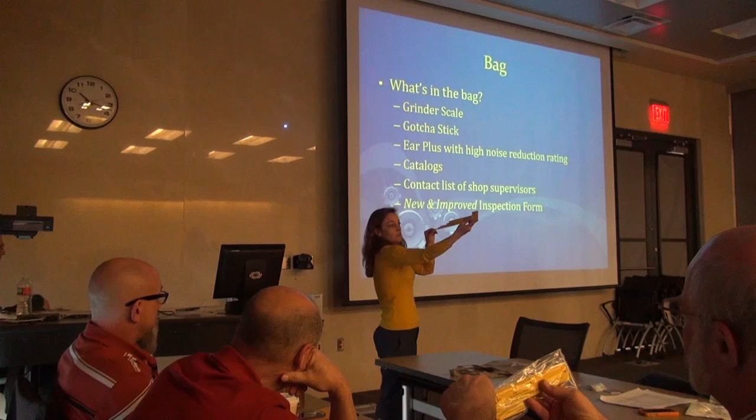Okay, you guys each have a bag. What's in the bag? What we put in the bag were grinder scales, for which you'll notice this is one of the requirements on the machine inspection form, and a gotcha stick, which I don't have - thank you. What a gotcha stick is, it shows you how far your fingers can be based on the size of the opening. So if the opening is that wide, you can safely have your fingers over here. If the opening is that wide, your fingers can be here safely.

We put high noise reduction rating earplugs in there for you to keep - not going to want those back. Also catalogs of some of the most common machine guarding companies that sell guards.

We don't support any of them in particular, but we want to give you guys some place to start: a list of the current shop supervisors that we have, and a new and improved inspection form.

Okay, we're just going to have a brief review. As you guys are all aware of the accident at Yale in 2011, from that came the student training. We convened a working group of several members here, including Joe Kakuda, mechanical engineering, and facility services.

Basically, it's an online training which introduces students to the university rules, which are also on this poster. If you need any of these posters, we'll be happy to give them to you. But a lot of it's common sense about not wearing certain things, not listening to a music player, things like that. They do the online training first, then the hands-on, and then they'll pass the test.

We've embedded some safety videos on the most common pieces of equipment, like a bandsaw, drill press, lathe, mill. And then they have the hands-on training, where a faculty or shop supervisor will show them how to work on the piece of equipment, and you guys will sign off that they know what they're doing.

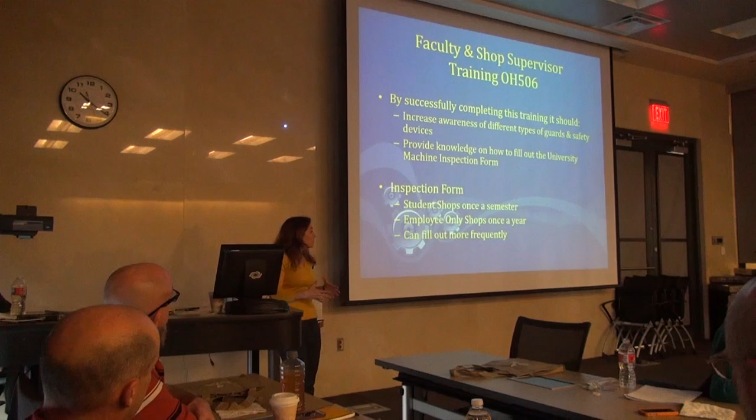You guys are always welcome to fill it out more frequently and to add additional requirements, and any equipment that's not on the list, add it. So if you have a planer, we want you to add that too. If you need some tips on how to inspect that, and it's not available on the website, just give us a call—Daniel and my contact information is on the contact list.

It can be a little challenging to find where our information is. So this is the main EHS webpage, and my group is the Campus and Occupational Safety. You click on there, and then you would go to Shop Safety, and this is where all the shop safety information is that's related to equipment.

So we've got the student training. We have this in PDF form for shops that employ people outside of the university—they can do that. There's the machine guarding training, the shop safety checklist, and that's so you guys can document when you've done the hands-on training for the students.

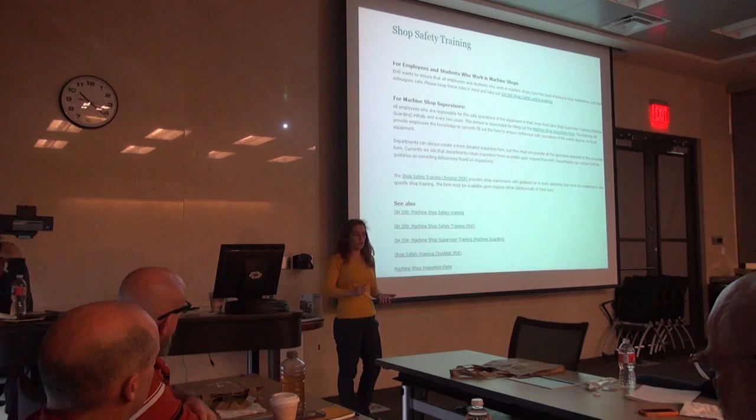And then the machine inspection form, which there is a copy in your bag. At this point, we're just asking you to keep the inspection forms, and when we come around to look at your shops and machine guards, we may ask to see that.

For any electrical work that is done on campus that you employ your electrician or you do it yourself, you've got to make sure that it's up to National Electric Code. What you would do if you don't have an electrician on staff is you would submit an SR10 to PMCS.

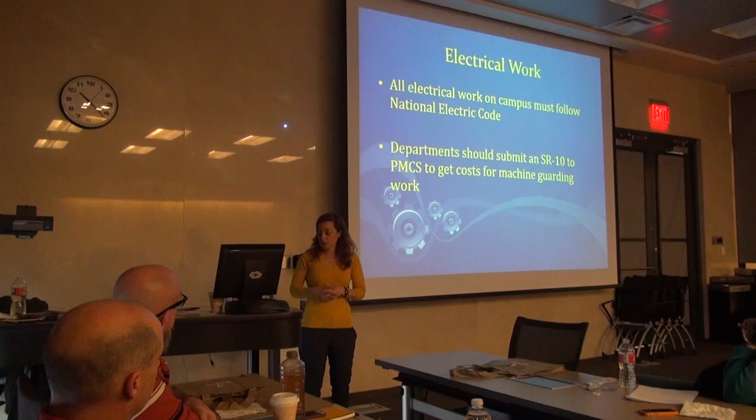And they can come over and give you an estimate for the work that needs to be done, and we can help you prioritize in terms of what should be done first. I know that several departments have successfully put in requests for WCI money to get their guards fixed and some of the electrical updates, so that is an option for some of you that want to submit for that.

As we were going through this, we've been noticing some holes that we needed to close.

We're also running the hearing conservation program right now. We've put noise dosimeters on people that run machine shops. And for many of them, their hearing levels were below 85 for a time-weighted average, which is about the sound of a residential smoke detector.

But we know that when you run certain equipment, it's still very loud. So in order to be protected, what we've decided to do is either the safety coordinators or managers such as Bo, Jennifer, or Lee will go around with an area monitor, and if the equipment is 85 or above, they'll put a sticker on it. And then the employees would wear hearing protection that the university would provide, typically earmuffs or earplugs.

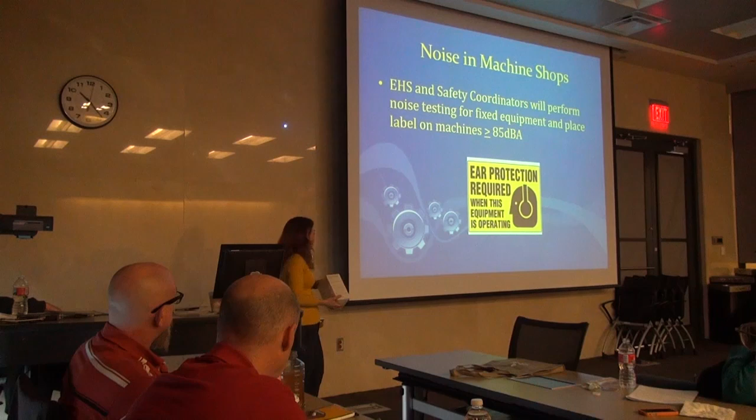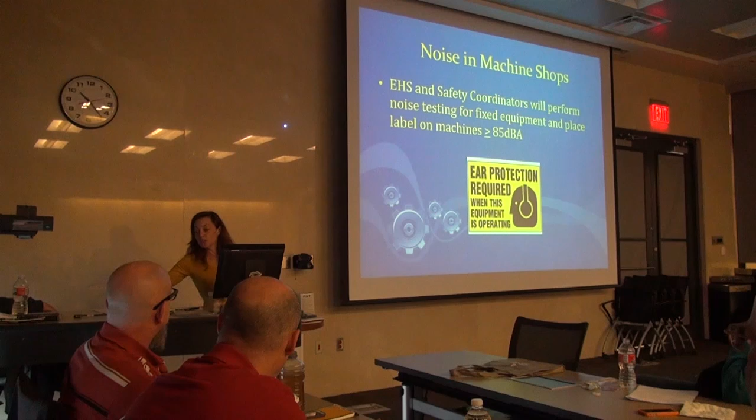And then you would read a one-page handout on hearing protection. We feel like this is protective because you're still wearing hearing protection, but it's not overly onerous. People who are not being exposed to 85 or above don't need an audiogram, so you're not required to do that. We'll be going through as we do the follow-up inspections.

What you guys should do again is just wear the department provided hearing protection, read the one-page handout, which is on the hearing section of the campus and occupational safety thing. And then again, you're not going to be part of the annual audiogram. You don't need to go through the 45-minute training.

In addition to that, what we realize is that there's some handheld equipment that we feel is very loud. So to close that loop, what we're going to be doing is the safety coordinators and my group will go around and take area readings for loud pieces of equipment. What we need your help doing is identifying that.

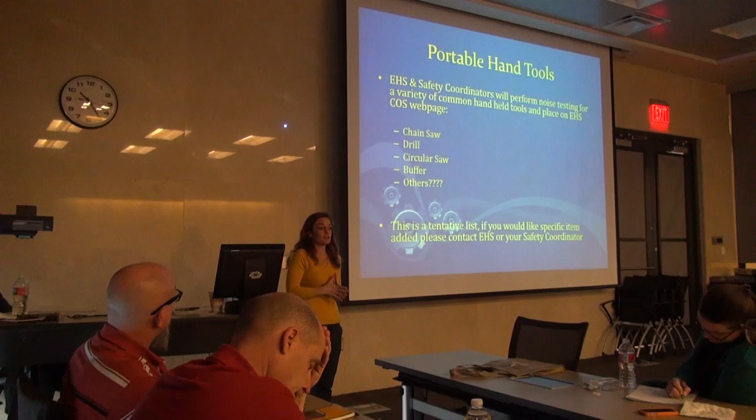We have an idea that chainsaws, some drills, some equipment that Parking and Transportation probably uses. If you can send us that list, we want to add it so that we can either give you advice like it's below 85, or for something like a jackhammer that might actually put your guys in the program. So we just want to be protective for both the fixed equipment as well as the large handheld equipment. We're trying to close the loop on that.

Okay, it's again the same deal. Your department would provide hearing protection, being plugs or earmuffs, and we would make sure it would reduce it to a safe level. Just read the one-page handout, so it's not overly onerous. You guys can do it in a departmental meeting, and it ensures that we are protecting our employees that use equipment not throughout the day, but periodically.

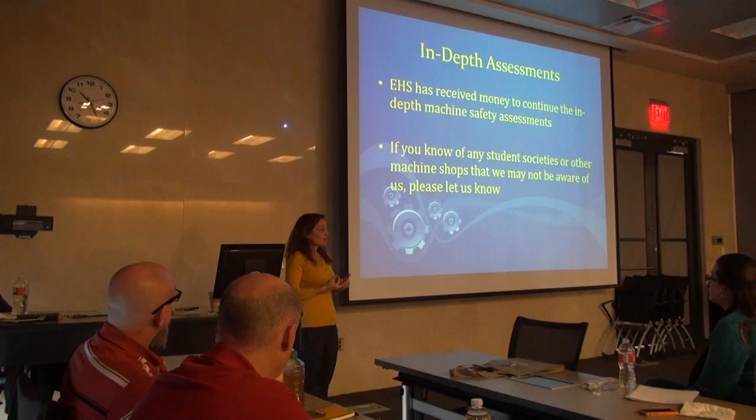Many of you have had an in-depth assessment by Dawn. We've gotten some money to finish that up. We're going to be finishing up housing and food, doing some of the student societies, and finishing up at PRC. Please let us know if there's a student society or machine shop that we may not be aware of. A lot of this we've heard through word of mouth. I know we've got several departments here that we've already done, but we're going to be finishing up Lake Austin Boulevard and CEM folks. So let us know about any other machine shops or student societies we're not aware of.

Okay, we're going to be filming the presentation, and we're going to put that on our webpage so that new employees or anybody that's missed today can go over that. And again, if you have any questions on machine guarding or anything hearing related, you can call the main EHS number if you forget Daniel or my name.

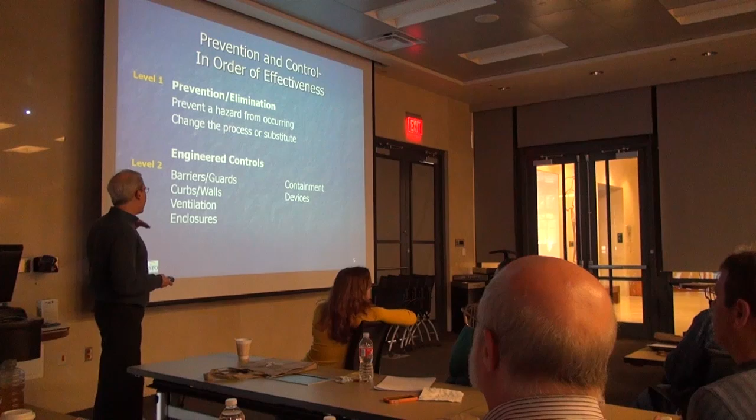It's not. But the next one down is really the focus of this, right? It's the engineered controls, the guards, the barriers, the sensors, all of that stuff that does rely on the user, on the operator, but not quite as much as the next one down, which is a lot of focus in a lot of places that I go to. So prevention, engineered, and then the management and administrative controls.

A lot of that has been kicked into higher gear as a result of the Yale incident. When I worked with them, they got rid of the lathe that was involved with that injury. They spent a lot of money replacing equipment, but needless to say, the money was forthcoming only because of the incident.

But then they also spent a lot of time here with the administrative controls. The shops are not open from midnight or 1 o'clock until 5 or 6 a.m., whatever it is now. That's it, they're closed. You can't go into these shops now. That's an administrative control — kind of elimination too, but it's more with the rules, procedures, and instructions.

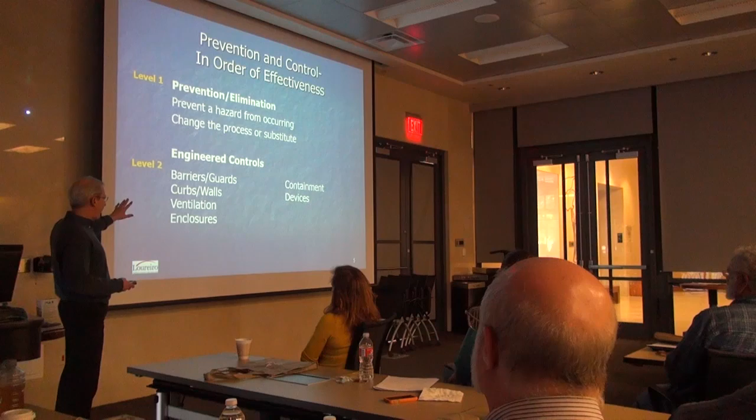I'm not saying that these are ineffective. I'm not saying that these are not important. They're just not going to be as effective as these. My personal experience with this is you need to do a better job with this, continue to maintain and build this, and not rely so much on this.

The signs and placards — after a while you don't even see them anymore. I'll walk in and talk to somebody about a sign. Sometimes they'll say, oh yeah, I guess — what sign? I'll come back and say, yeah, I guess there is a new sign. You don't even see them anymore. Again, I'm not saying eliminate them, but they're going to be the least effective in the so-called hierarchy of controls, prevention and control. That's the order you want to try to follow.

And then by the process of elimination — okay, tried that, nope, we have to use that machine. Can we guard that machine? Well, we've tried to guard that machine, and today we'll hopefully find some more creative solutions to some of these things, but then continue to work your way down.

People in this room, when you're standing and introducing yourselves — I've met a lot of you, a lot of folks I have not yet met. I suspect you're pretty familiar with this, but I'm going to go through it pretty quickly.

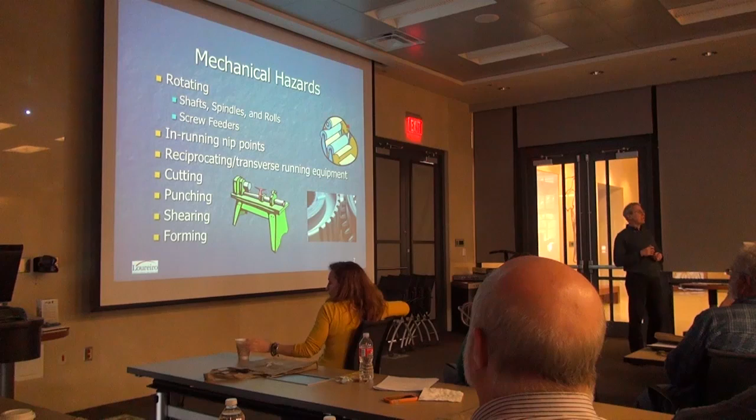The hazards associated with your equipment, right? There are hazards — various things that these machines do, typically to wood or steel or something, that if it does that to the human body, it's going to be a problem. So you've got so-called mechanical hazards, so-called physical hazards. Things can fly out, obviously air.

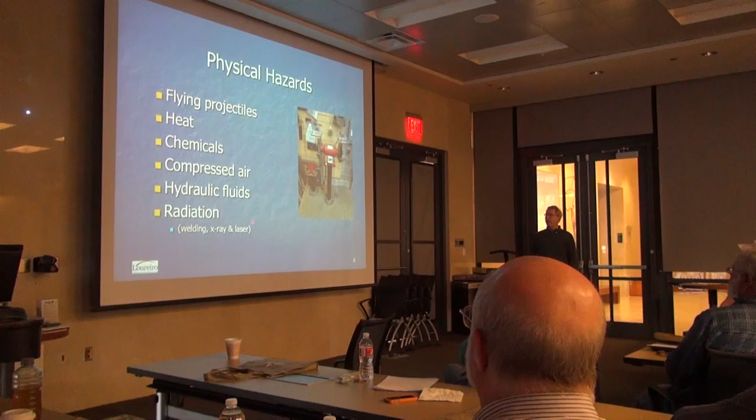I even did a laser safety evaluation at a facility last week up in New Hampshire. I don't typically see it — this company fabricated, or they did work with lasers. Almost every machine in there had a laser in it, and that was kind of unusual. So, any kind of physical hazards associated with your machinery.

And mechanical — this is a great picture because it shows these so-called nip points. People like to talk about nip points. What's a nip point, right? If the gear is turning this way, you've got an in-running nip point there.

Now again, this is behind a cover, but some of them are exposed sometimes, depending on the direction. This is going in, this is going this way — the belt's here. That's an in-running nip point that represents a hazard. Exposure to that at a risk — that's where you get into discussion, but it clearly represents a hazard.

I love this one because this is one of the oldest drill presses in the facility, on your campus, and there are definitely nip points on this. When they built this machine — this is a great old machine, and by the way I do love old machines, it's not like 'oh my God, get rid of these machines' — but how do you bring them up to today's standards and protect people from these nip points? The belts are exposed, everything is just out there in the open. That was not the standard of the day.

Rotating shafts. This is a more modern lathe than the one the student was killed on, but she wasn't killed on the chuck or the point of operation. She was killed on the lead screw. Her hair got caught on the lead screw. I've always looked at these as hazards and to a certain degree risk, but it certainly changed my perspective when something like that happens.

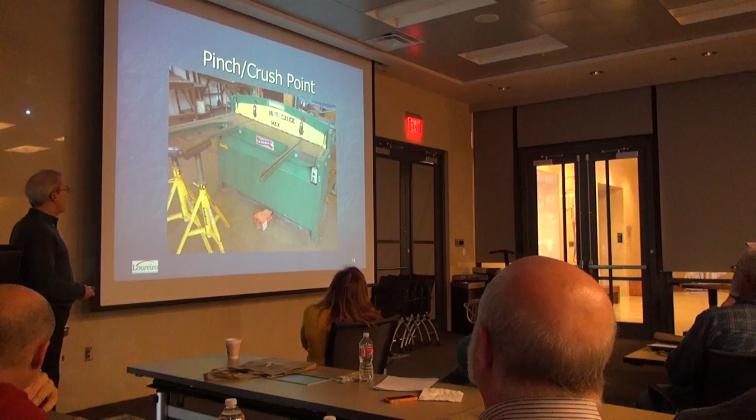And then the crush, pinch, shear points on something like a powered shear here. Is anybody here from ARL?

Yeah, so you recognize this one? I think this is out there - maybe not, I can't remember. I've seen so many pictures, so little time, but this is a little press brake. And there's a pinch or a press point there. Very difficult to guard something like that, right? Because sometimes you got to get your hands really close.

That's the kind of stuff that we want to talk about. What are the challenges with regard to some of these machines to at least improve the safeguarding? Do something - give people something that they can use, maybe even part of the time. Don't forget about some of the auxiliary equipment. Call it a shear point, call it a pinch point, whatever, where people can get caught in and between, even if it's not necessarily at the point of operation.

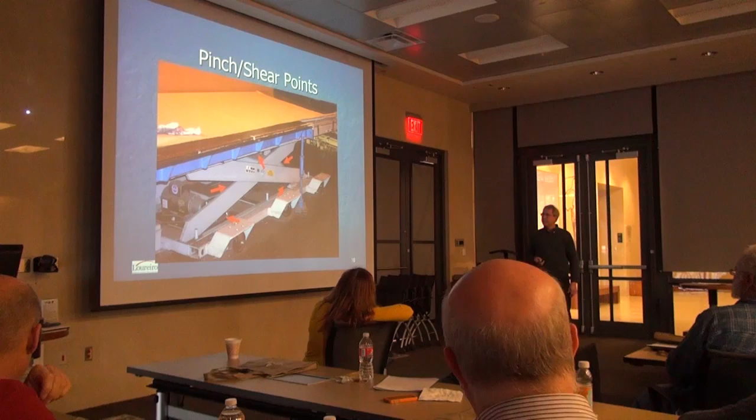Let's see if I took a video of this. I think this was a Sikorsky plant. You can see just on the surface of it - what the heck is it? Okay, so I told the guy to start the thing, so you're standing near there. It came right down to the floor.

So I'm working on - you can kind of see up here, anyway, the point of operation is up here. You're standing near there, boom. I mean, there was no requirement for steel toe shoes in that particular facility.

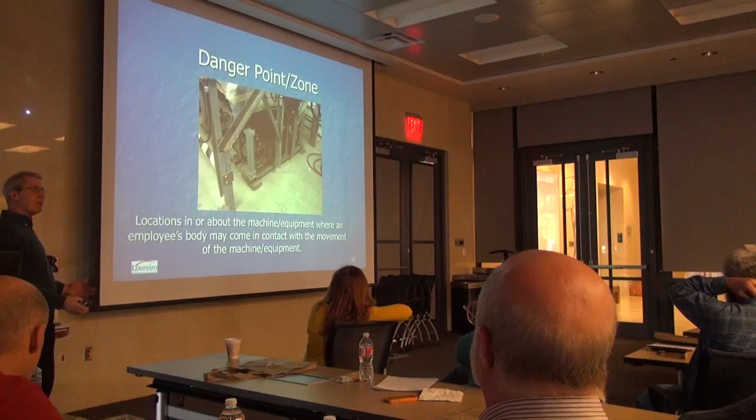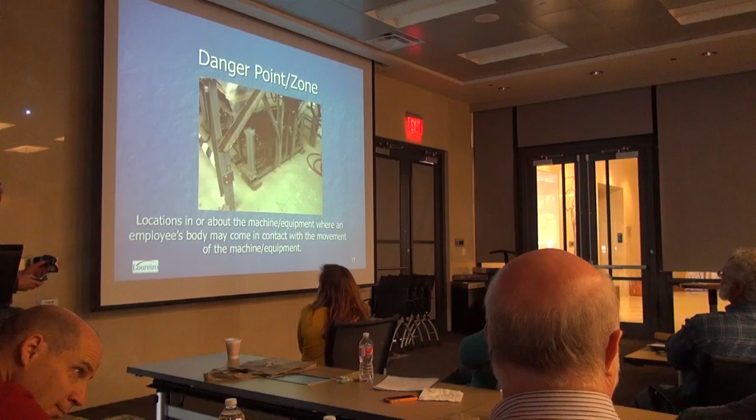So sometimes you have to see the machine in motion. It's a challenge for me coming in any given day to your shops and really understanding how some of these machines work. I'm certainly familiar with most of them.

Point of operation - that's a term that safety people use. I'm not sure everybody uses that same term the same way, but it's where the work is done, right? So on this, it's a little hard to see, but in this shot you've got a drill press where the point of operation would be where the tool hits the part, if there was a part in there. Or at the front of the grinding wheel, right there on the tool rest, or on the disc sander - that's the point of operation, which varies tremendously by machine.

And the points of operation represent hazards. The exposure to hazard is what you're doing with the part or whatever, and we need to look at those hazards and then the controls that would be useful.

Geology, right? You're crushing stones, rocks, whatever. This was behind - don't look behind the curtain, but I like to look behind curtains, and behind there, people are not prevented from reaching in there, but a lot of things can fly out. There was some protection there, but it wasn't in the greatest shape. Sometimes guards are put on there, not maintained. Sometimes guards are put on there by the manufacturers, not going to work for you.

Points of operation, it's interesting - just one comment on that. If you purchase a piece of equipment, you say, well, how come it's not guarded to the current standard? The points of operation are really not the manufacturer's responsibility, they're the user's responsibility. Some of those other things are going to be controlled by or covered by and guarded by the manufacturers. But typically the point of operation, that's up to the user because they don't have control of it.

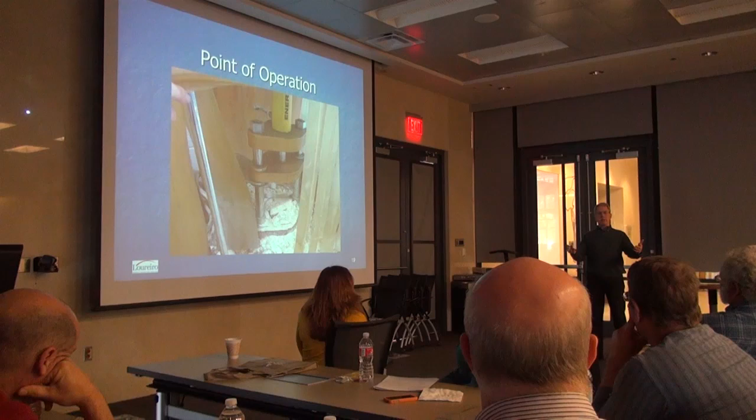Certainly from a regulatory standpoint, even the standards talk about that. The American National Standards Institute, ANSI - who's responsible for what? When you talk about point of operation, it's the user. You folks are the users. So don't assume that just because you bought it and it came in with, let's say, no guarding at all, that it's okay. Not necessarily.

Some machines have multiple points of operation. This is probably the classic machine that's got one, two, three, at least four in this picture. Different thing, very versatile machine, very tough to guard.

The iron worker, so-called iron worker, interesting name when I first got into machine guarding. What's an iron worker? Isn't that a guy that climbs around on buildings? So, guarding points of operation.

Okay, so those are quickly just some of the hazards associated with some of this equipment.

Requirements, standards, I call them requirements. You folks are not as subject to some of the OSHA requirements that a lot of my clients are. That's okay, we can still talk about them from an overall standpoint. Even if there isn't a legal requirement in the OSHA world, you've got this thing called a general duty clause. Think of it as a UT Austin duty clause.

You have a duty to protect the users or provide an environment, kind of translating this instead of employment, let's say an environment free of recognized hazards capable of causing serious death or injury. Just use it as your own standard and ask, how am I going to protect my students, how am I going to protect my employees from serious hazards, which we briefly touched on or not.

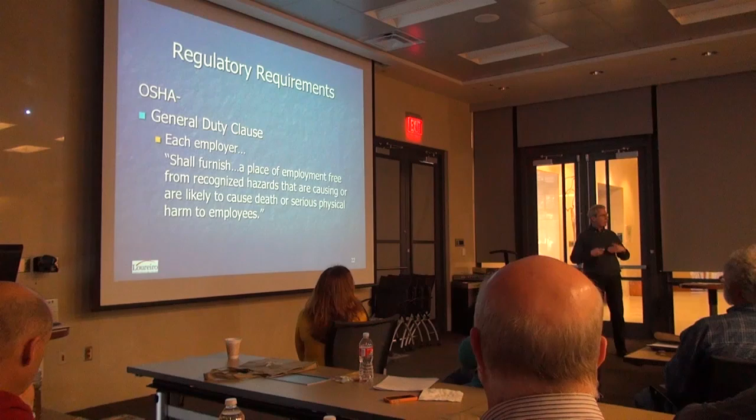So recognized hazards, OSHA puts that term in there. I would encourage you to use that here, a recognized hazard to the university or universities in general that can cause death or serious physical harm to, just substitute, operators, even students. So you can easily adopt this kind of thing, and then the challenge is how do you apply it to your particular pieces of equipment.

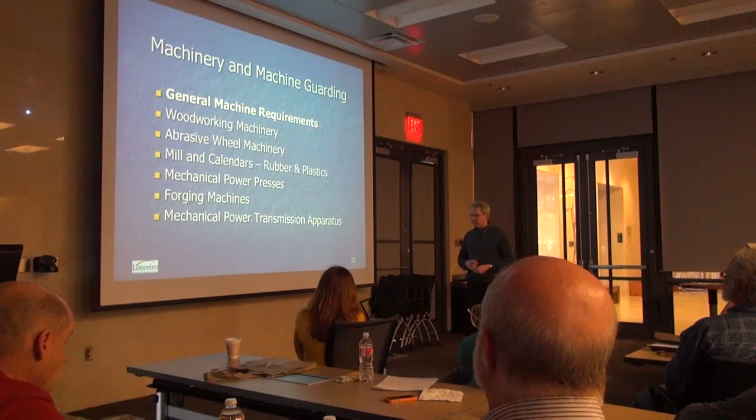Well, OSHA goes on to have these general requirements, and then different ones by type of equipment. Not a lot in there, except for maybe in these mechanical power presses. I'll cover just a few here that I think can be useful, ones we've tried to look at here and in other universities and certainly in industry where you have these requirements that are specific or unique to that type of equipment.

I'd be remiss without briefly mentioning the overlap here with energy control. You have machinery that's in operation that you're trying to protect and guard people from. But what about when someone's changing a wheel on a grinding machine or a blade on a bandsaw? Do you control hazardous energy properly here?

If you were subject to the OSHA requirements, you would have to use lockout, tagout, and not just turn the power off, but lock the power off and test the power to see if it was off. If you were doing electrical work, you would have to have a qualified person use a volt meter to check for zero voltage. That's how serious they are about controlling hazardous energy, if the power can be on.

And if you're turning the power off, which you probably are to change, let's say, a bandsaw blade, are you putting a lock on that? That's the overlap here with machine guarding, because you're now taking off a guard or opening a guard, so it's not protecting that person anymore. That's all I'm going to say about lockout tagout, but there is definitely an overlap.

Okay, so the so-called general requirements in the regulations as they are now are just that. They really don't give you a lot of guidance. If there's hazards, you've got to identify the hazards first, and you've got to protect people from the hazards. What does that mean? Well, it means a lot of different things.

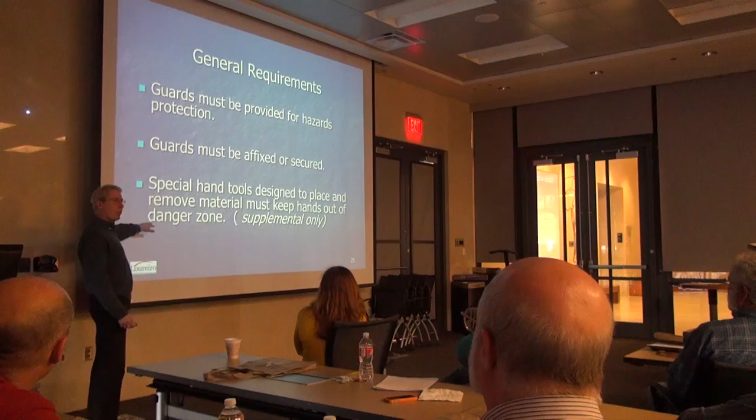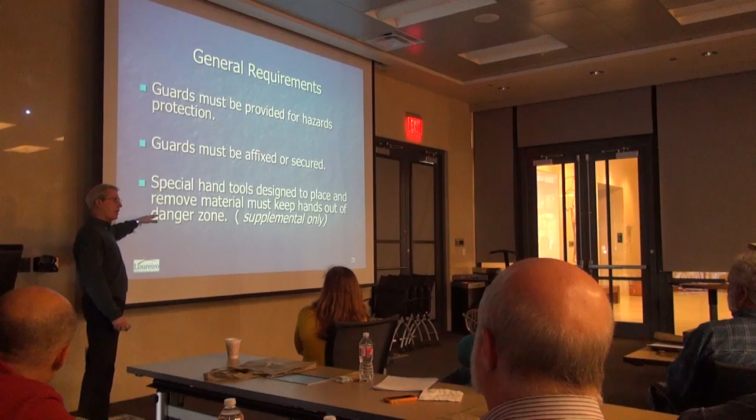Please look at this, hand tools as supplemental to guarding. Very important for things like push sticks and whatnot on saws. Something you want to keep doing, but that is, in the eyes of the regulators, not guarding. It's supplemental to guarding, in addition to guarding, but still important.

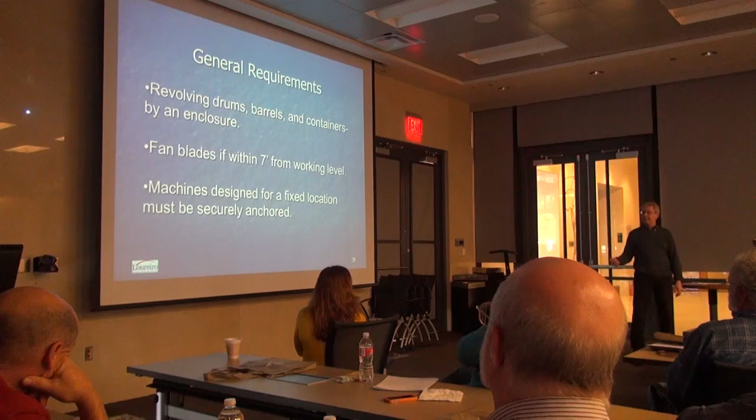Then you've got a couple more on the general side of things: rotating drums and such, that's pretty straightforward. For whatever reason, the regulations back in 1970, when the Occupational Safety and Health Act was passed, talked about fan blades, and a lot of open fan blades. If they were up high, and we'll talk about guarding by distance in a couple slides, if it's above a certain height, then it's not exposure to that hazard. You don't have the same risk associated with that.

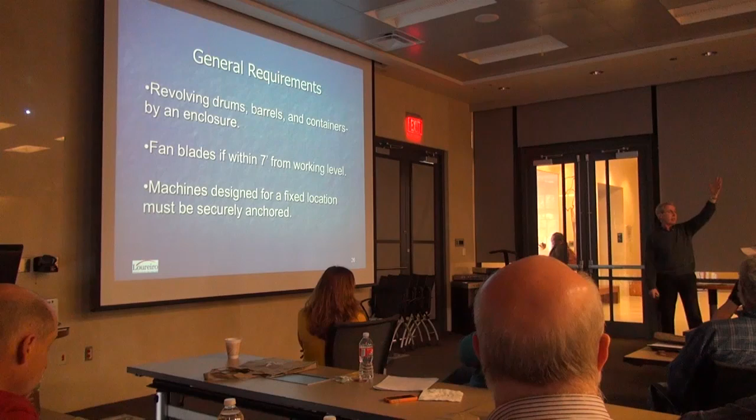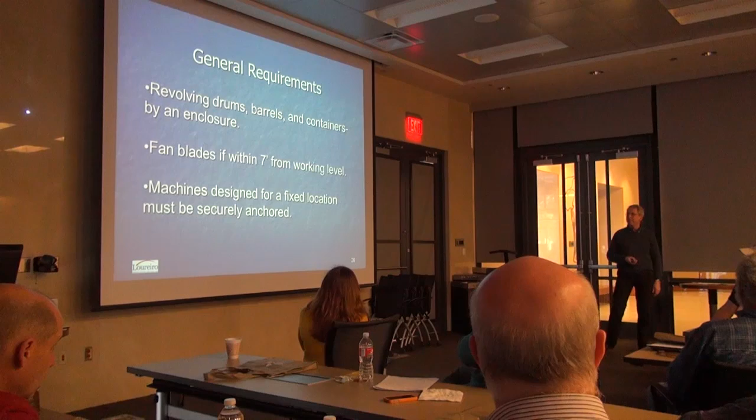But if not, then you've got to make sure you can't reach it, and that's where our gotcha stick comes in. If you've got fans, and you've got a lot of heat here in the summer, or maybe most of the year, see if you can stick your gotcha stick through the openings of that fan cover. That's a good test, because Elena's fingers are small, and my fingers are small, and some of the guys' fingers in this room too. So that's what they use.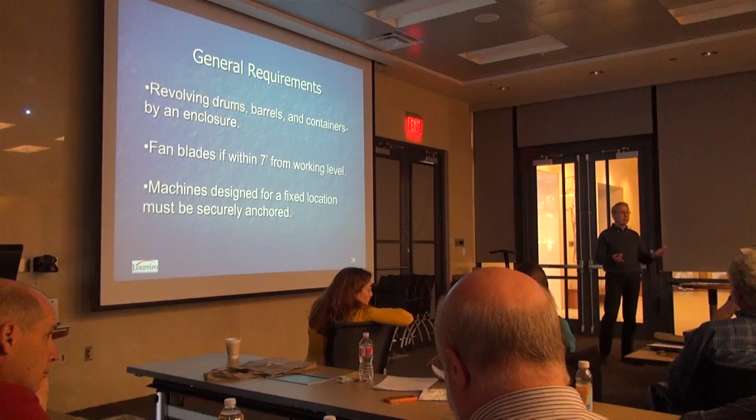I talked a lot with some of you about securing machinery to the ground. Now, if it's a portable piece that needs to move around, then you should make it stable so that it doesn't wobble and increase the risk or hazard. But if you can get a place for it, secure it to the ground. That's something the regulations and standards really want you to try to do.

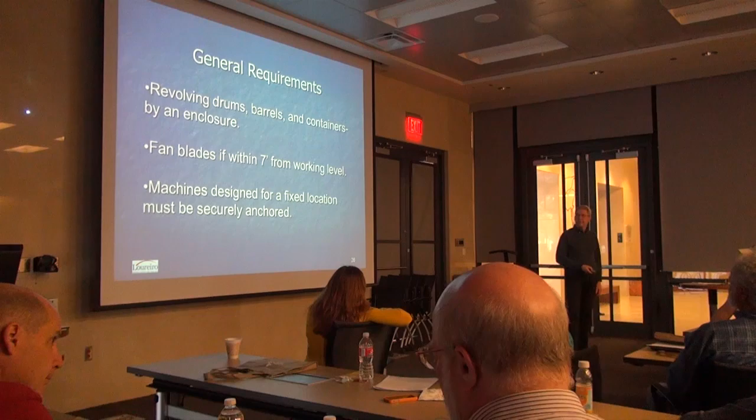Now, other things relate not necessarily to the point of operation, but to machine safety. I know some of you are familiar with this: if you can't lock it out, can you unplug it? New machinery coming in, or maybe modifications and upgrades, are made so that you can physically put a lock on something. Some of the older equipment can't do that.

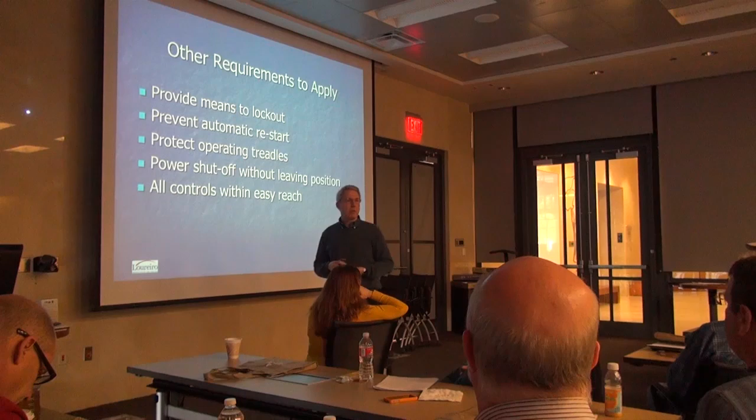Automatic anti-restart, so to speak. If there's some kind of loss of power to that piece of equipment, it doesn't have to be a massive power failure on campus, and then the power comes back on, it should not restart if there's a hazard associated with that. Low probability, but it's tricky to talk about how often these things might occur. The potential is there.

Foot pedals are nice. You don't even have to worry about emergency stops if you're controlling, say, a drill press with a foot pedal, but it should be protected so it's not inadvertently stepped on. So just some sort of cover there.

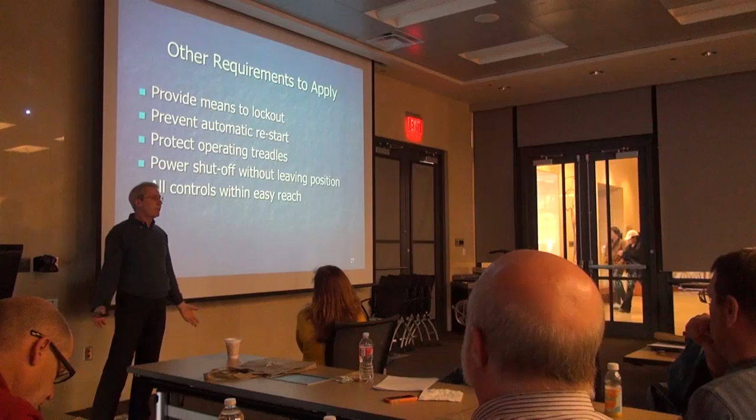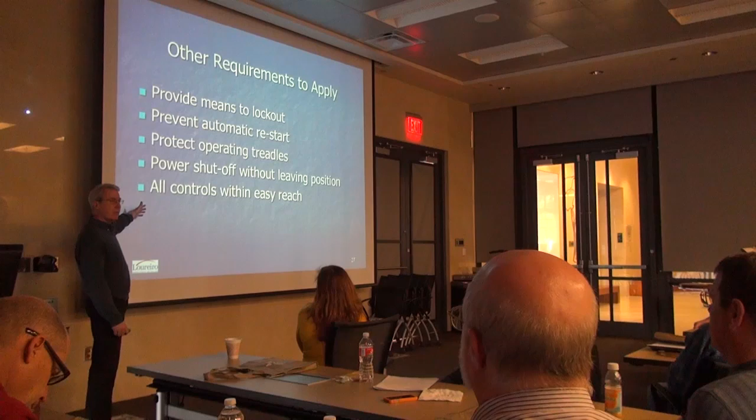Elena was talking to me this morning about how you can reach an emergency shut-off or stop without leaving your normal work position. What are the distances there? Do you need more than one? So we need to look at control, that's after the fact, but it can prevent things from becoming worse. One of the reasons that woman died, one of them, or many, is that she couldn't reach any kind of shut-off. She didn't die instantly. She couldn't reach a shut-off, she couldn't turn the machine off.

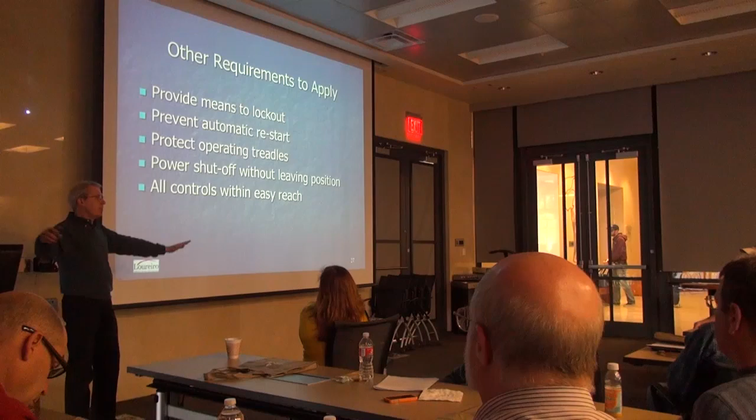So any control needs an easy reach. That's tricky, because some of the machines are built for, I don't know, gorillas or something. It's very, very challenging, so maybe you can make some modifications. You guys are creative, and the creative solutions you come up with as a team or as different departments are going to be the most effective.

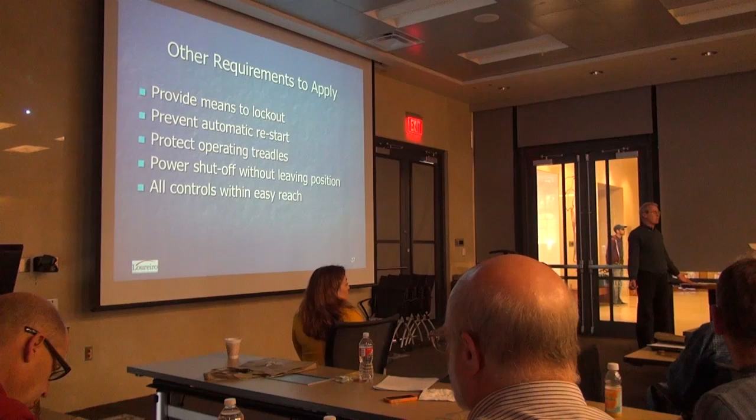Because they're going to work for you, as opposed to a lot of places where guards get put on, but not much time is spent with either the owners of the machines or particularly the operators. And then what happened to it? Oh, I don't know, second shift, somebody took it off. There's no explanation.

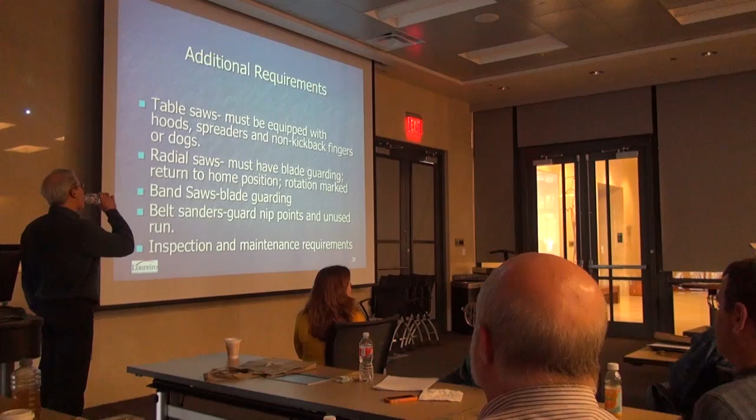You can read them there. You can get some more guidance from OSHA or from ANSI. There are ANSI standards, American National Standards Institute standards, for these different categories of machines as well.

Do you have a library of the ANSI standards, the B11 series, for instance? Do you remember if we bought it or if we can get it from somewhere? Yeah, buy it. You're an educational institution, probably like that.

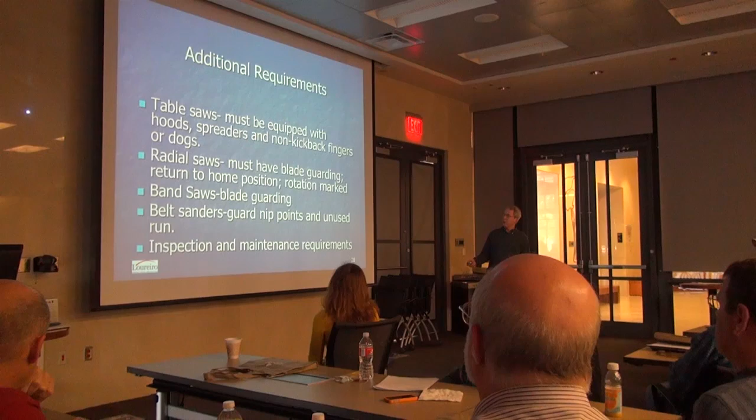So you take a radial arm saw. One of the things that's required is that it must return to the home position. I found a number of them here and elsewhere where you pull it out, it slides on a track, and it did not return to the home position.

For some reason it wasn't designed that way, which I found interesting because that would be one of the things I would think would be built into the saw. But, or it was broken, or you had to add it because it was such an old saw. It's not that hard to put on there.

And then the fact that this is just an exposed blade. Can you completely enclose that blade for an operation like this? No, but there are things you can do there.

So you're looking for the hazards associated with that. You're looking at the controls which are out here. Can you hit that button in a panic mode and will it stop? I kind of use that as my test - can I palm that?

You see this little thing here? I think I purposely got that picture in there. What's that? Extension cord? That little device. Extension cord maybe, but what is this?

On-off switch. It's an anti-restart, and I think some of them are GFI now. Those are the more expensive ones. The little ones, I have one in my backpack. On the 110, it's like $20. On the 240 stuff, I think there's going to be discussion on that. So anti-restart - you don't want that saw to start up again.

So the different things that I covered in my video - how many people have seen the video that I made? Just the supervisor training, just a few. Okay, all right. So I think this is one of the machines that I covered.

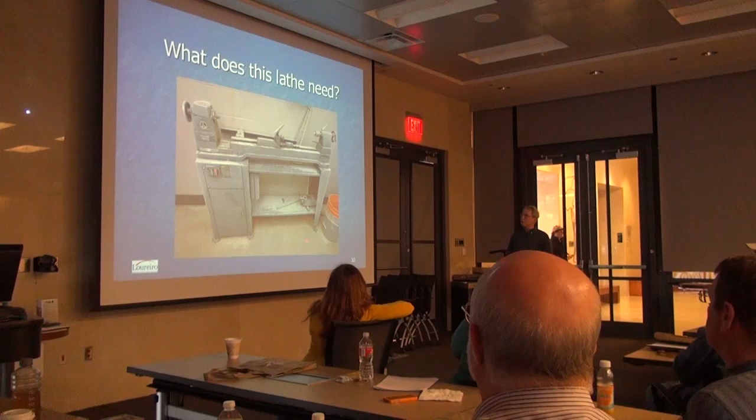And there's a start-stop button there, but that one looked like maybe you could just, when it's in the on position, hit it and it's going to stop. I wouldn't be looking for any additional controls on that one. Is it secured to the ground? Does it have anti-restart? It's a pretty simple machine.

Based on the things I talked about, the categories of hazards - what would be the hazards associated with this? So there's a rotational hazard, right? There's an entanglement hazard. What else? Well, the hazard - something could be flying out.

If we were in Texas, I'd have them here - I guarantee I'd have them here. These guys work with operators and get shields on it. Now, the requirements are usually put on by - so here would be by the university.

This is the requirement, and then, okay, how are we going to do this? My team could come in and help you do that, or you can do that yourselves. You can avail yourselves of these resources to put something on there to guard from, protect from, entanglement hazard, the point of operation.

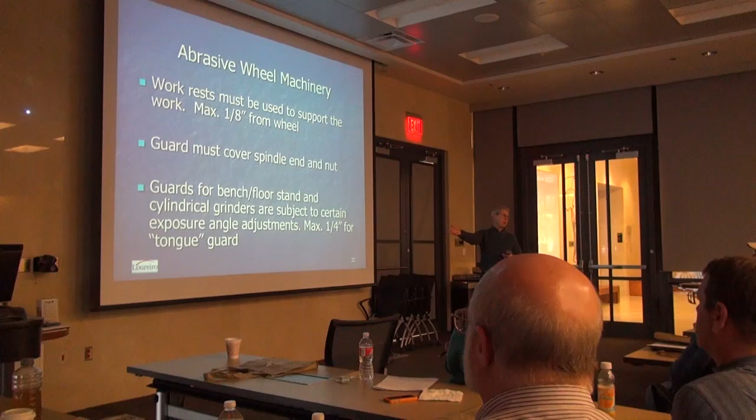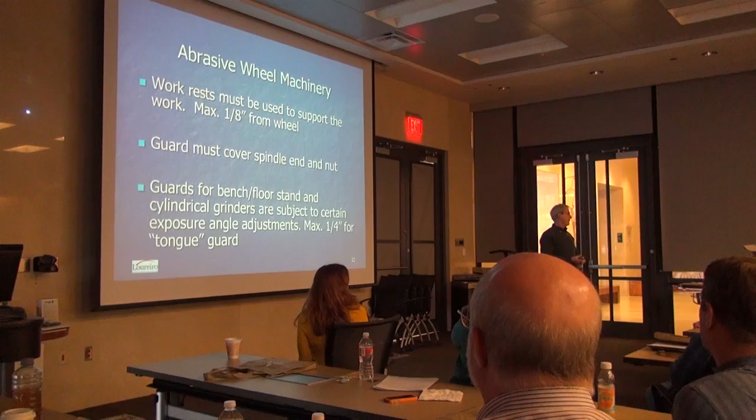My experience is the grinding machines, nobody really owns them, so these things wear, or someone puts a different wheel on them that's not adjusted. You need to constantly adjust those.

How often are your wheels changed? Maybe they're not changed that much, so this doesn't come up that much, but when it is changed, that wheel, if it's not been stored too safely, it might have a crack in it. The first time you start that up, that's when you're going to find that out.

This is grinding people stuff. This is the blotters, the flanges, free of foreign matter. Very important to mount those things properly.

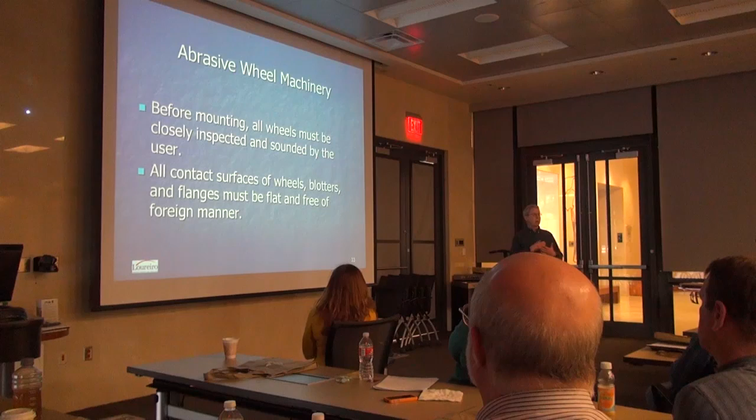The toggle switches on these things, is that something you could hit in an emergency that's really going to help? Toggle switches are different. The new grinders now, in my experience, a lot of them come in with this little paddle switch. It's not an e-stop—an emergency stop on a grinder is going to cost more than a grinder. So the paddle switches, they're usually red and yellow, you pull it out to start it, and it pivots on a little hinge, and you push it in to stop it. Much better than these toggle switches from a safety standpoint, but there's an awful lot of these toggle switches out there, you guys know that.

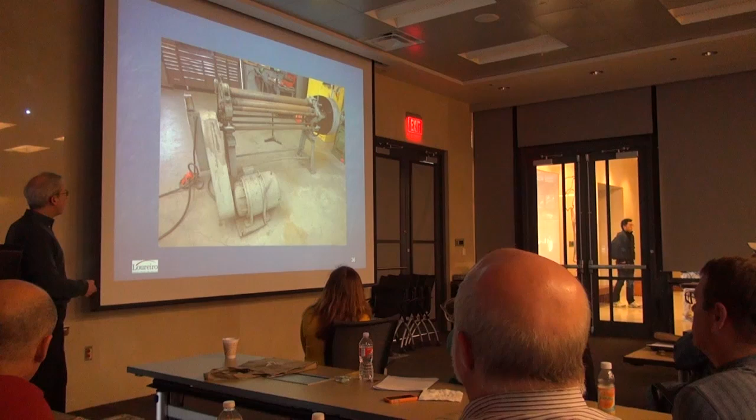This is a beauty. This is an old roller that at the time we decided to lock out, because not only the hazards associated with the rollers themselves—the point of operation there would be where the metal is fed into the rolls, back and forth—but then look at the power transmission exposures here on the back side. This isn't bad right here, but the back side of these were open, so that's usually easier to guard.

Something you might not think about and say, well, who in the world is ever going to stick their hand in it? Don't start down that path, because then you just stop guarding anything since no one's ever going to do it. You don't know that. You don't want to ever be in a situation—if you have an incident like this, your shop is closed, that's it. There's going to be all kinds of people crawling all over the place and asking questions.

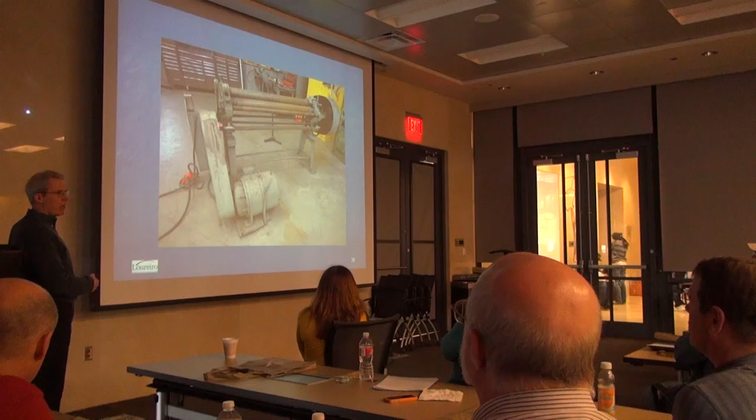It's hinged, it's easy to open. I personally want to have it so that—and this is a standard, I know a lot of you heard me say this—a tool has to be used to open. Now, if you're opening that, and you don't have to have it running... I know some people have them running when they move belts up and down, but say you want to move that, shouldn't that now be control of hazardous energy?

In this particular case, you probably unplug the machine. Unplug the machine, it's an extra step. Seems a little bit maybe over the top or too conservative, but those kind of guards should be secured so that not just a flathead screwdriver, maybe an Allen, just something on there so that a student operator not familiar with it has to take that extra step and is thinking, well, wait a minute, I'm actually removing a guard. I'm opening it, it's still attached—that's the fallacy.

What time do I have until on the schedule? Until 11:10? 11:10, all right. More power transmission.

There are lots of standards and requirements out there. You don't have to certainly know these all. We're going to talk a little bit about this risk assessment one, but Elena mentioned the National Electrical Code. Technically, the machinery should conform to NFPA 79, not 70, which is the National Electrical Code, but 79, which is a standard—you can read it there. For industrial machinery, a lot of good stuff in there. Same organization that created it, but that's what should control your modifications to your machines.

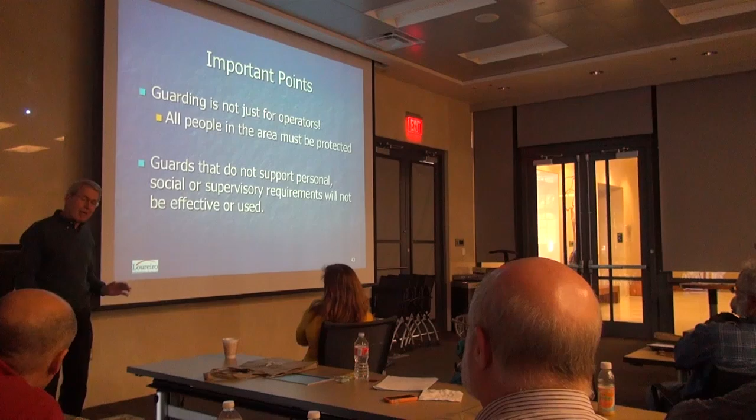Is that required? No. Is that helpful? Depends on if people are taking this guard off sometimes, right? A lot of companies have interlocks because guess what? People weren't using the guards.

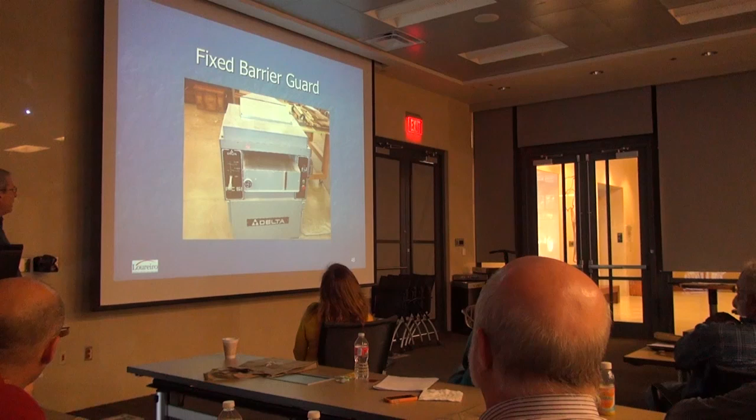This is a fixed guard, right? This is physically protecting you from the blades that are underneath there, planer. Or an enclosure, that's fixed. Some of them are bolted on, some of them are hinged, but if it's hinged, make sure it's secured.

The adjustable barrier guards, right? I know this is not, this was an Italian machine. Was out at the structural engineering. Is anybody here from there? From here? Do you recognize that machine? Yes. Okay.

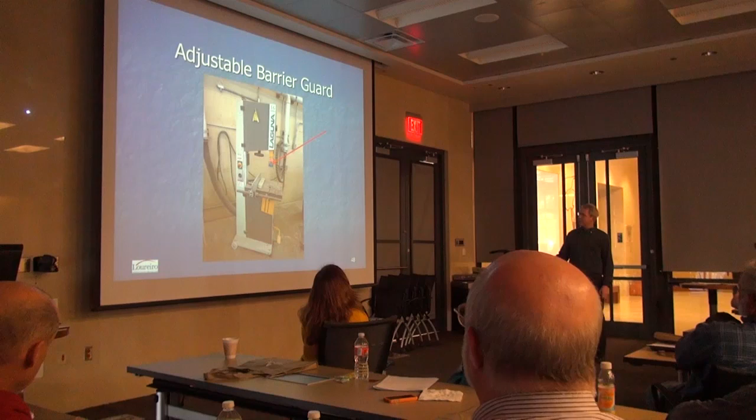So I like this machine. I don't know if you guys like it or not for what it does, but from a guarding standpoint, this seemed to have all the guards. Underneath here, there was an adjustable guard. You had a brake, and then you had this sliding guard. And then at the end of it, is that still in place? Is it still there, so you can still use it? It's got the nice emergency stop with the yellow ring.

I mean, this was like the poster child. There it is. Can you make them all look like that? No, but you can. The hazards that they're trying to protect, even underneath the table. This is an adjustable barrier, which needs to be adjusted. The practice here should be if that's not in use. Now that didn't even have a blade in there, right?

But if that's not in use, that should be all the way down. Or why would you want to just keep it down? Forces the operator to adjust it. If it's up like that, they're not going to adjust it. Human nature. You're just going to, some people might, but you're not going to bring it down.

So I said this to this shop in Cincinnati. Every single time you look at, again, this was a place that had a lot of administrative controls. Practice should be, if that machine, when you leave that machine, that guard is all the way down. So the next person has to move it up. It's a little extra step.

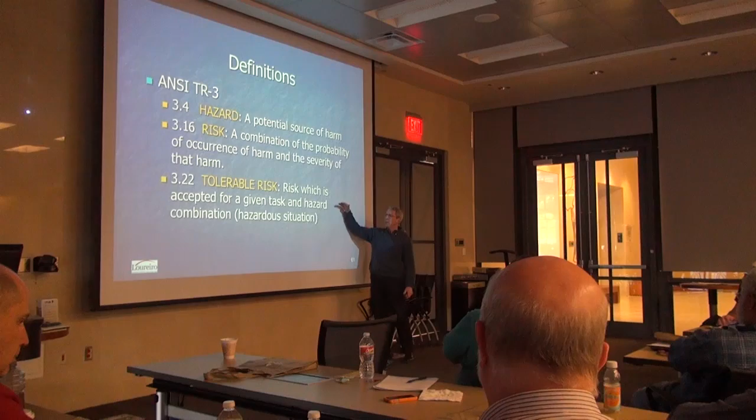What's an acceptable risk here now? Used to be maybe down here, it's rising, right, it's going up. That's not acceptable to have that unguarded piece of equipment, or the fact that you've got machinery out there that really hasn't been looked at recently. That's not acceptable anymore. So the bar is being raised. You don't want to go from here way up gradually, right? People are going to continue. So the acceptability of some of these things.

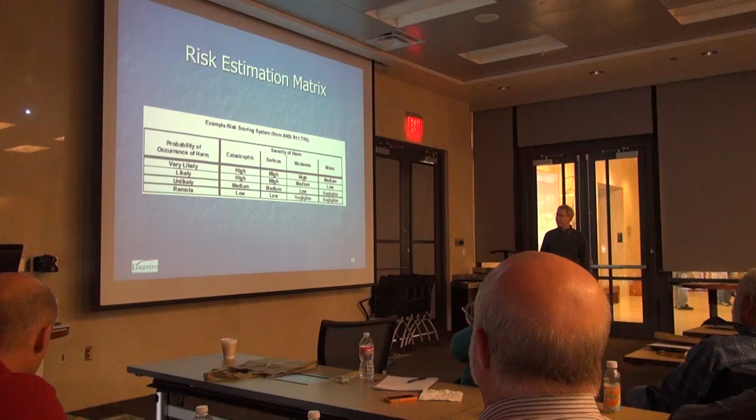Okay, I'm going to skip this. I was going to have just some examples here. Thank you very much, again, a lot of information.

So my name is Scott Allen, I run the machine shop in mechanical engineering. It's one of the largest student shops we have on campus. We kind of have two different shops - a student shop, and also a journeyman shop where we operate as a cost center, and we also have students come in and operate the machines.

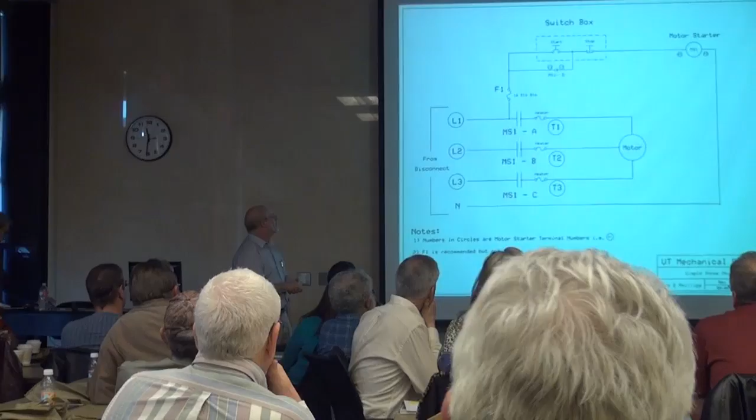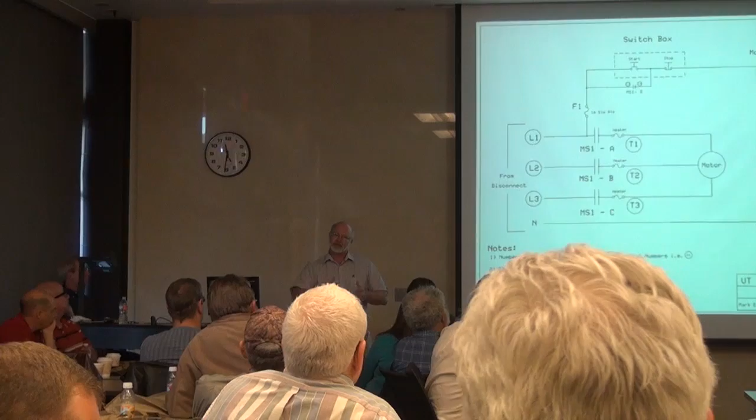Why don't you go to that first circuit? It's an old circuit, World War II, at least. What it involves is a motor starter, because we're talking rotating machinery - it's going to be a motor that you're controlling here. So you want to get what's called a contactor or motor starter, a relay designed to take care of the starting surges. You don't want to use just an inexpensive 10 amp relay - you'll burn the contacts. Get a motor starter.

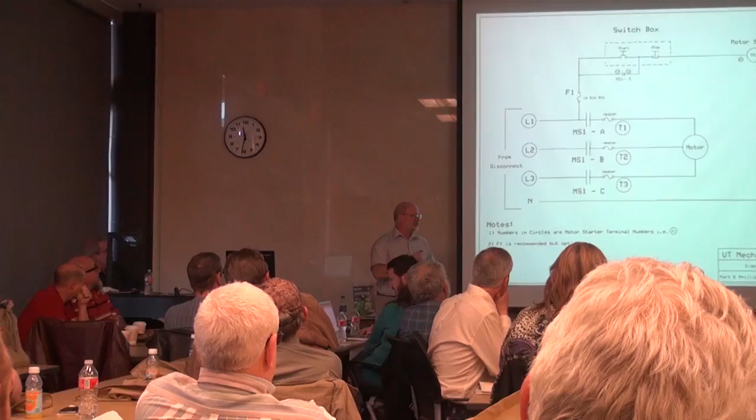You've got your three-phase power coming in, and probably you've just got the 3 lines, because everywhere on campus it's the 208 delta distribution on the 3-phase. You won't have a neutral available to use, so you'll have to talk to the electrical shop guys - they can pull a neutral for you. Don't use the chassis of the electrical equipment as your neutral if you want 120 volt control.

So again, you may have to have that line pulled in, but that's a real easy thing for the electrical guys to do. The zone control guys can do that.

I put a fuse there. The way the circuit works is your power comes up to the start switch, which is normally open. You push that. These are momentary controls, momentary switches. Current goes on through the normally closed stop switch and energizes the motor starter relay. Your relay is closed, turns the motor on.

When you want to stop, and the MS1 switch D, that's an auxiliary contact on your motor starter. That's a normally open contact. It closes with the relay and bypasses the start switch, so it stays running when you release that normally open momentary start switch. It locks itself in until you push the stop, and then everything falls out and shuts down.

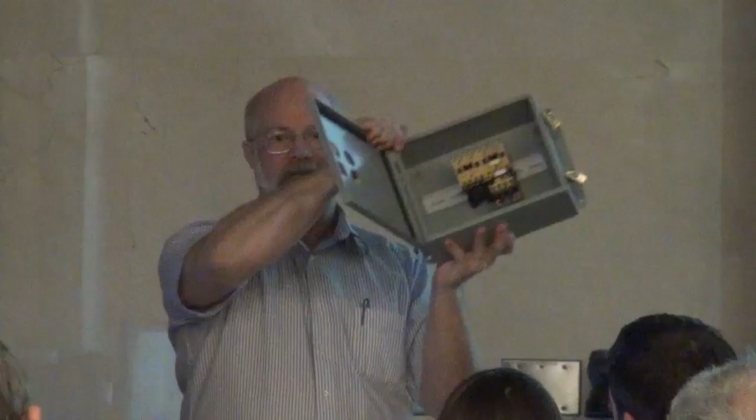This is the box that we hung on our wall, and we used a motor start. We also put an overload circuit with an adjustable current trip. I've got a spreadsheet that didn't make the display, but part numbers for these are readily available.

Gaskets on it. If you're going to be using cutting oil in your process, you're going to splash oil on all this stuff. In the theater shops, dust is going to get everywhere. These switches are immune to it. You won't ever have a spark or start a dust fire.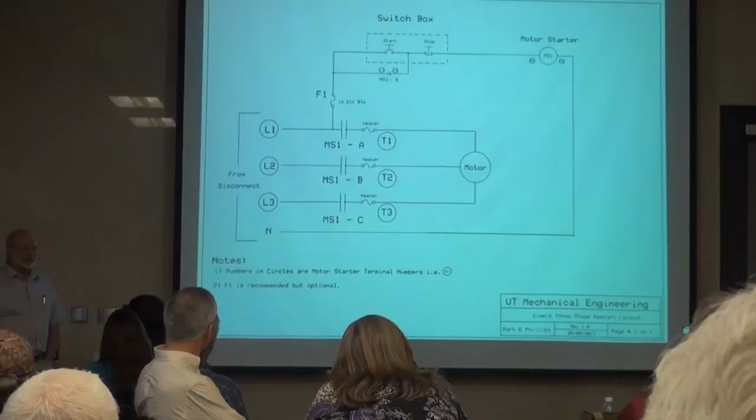This is the basic generic circuit for an anti-restart. We also used illumination in our shop, in the student shop, which gives our TAs the ability to look around the shop and see which equipment is on and off. It also tells you that something's happened to that machine and it's lost power just by scanning the shop. So you can come in the morning.

Why don't you go to the next slide, please? That's the wiring for the lamps.

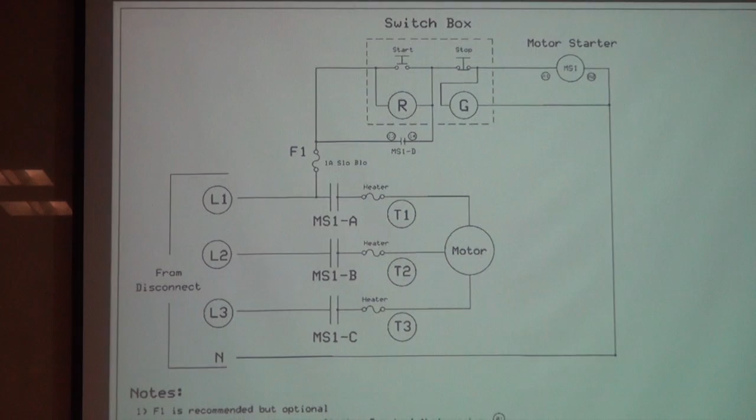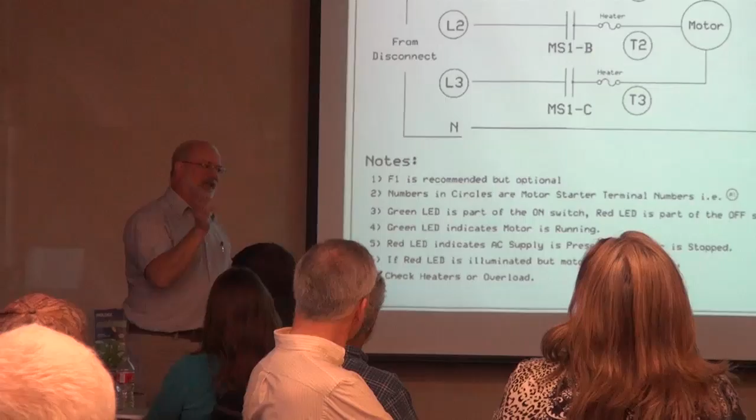In this drawing, and you can change it if you want to, we went with the industrial convention that if the red light is on, the machine is off but has power. If the green light is on, the machine is in operation. Some people like it the opposite, but that's what this design does.

Again, these diagrams are available to you. We had one additional requirement in the student shop: if you're familiar with mills, they have a high and low speed, and you have to turn the motor clockwise or counterclockwise depending on speed, because the spindle changes. We didn't want students to accidentally run the mill in reverse and chew up the tools.

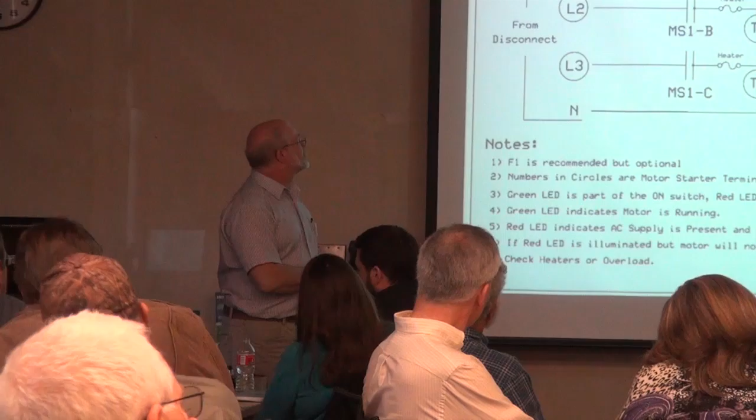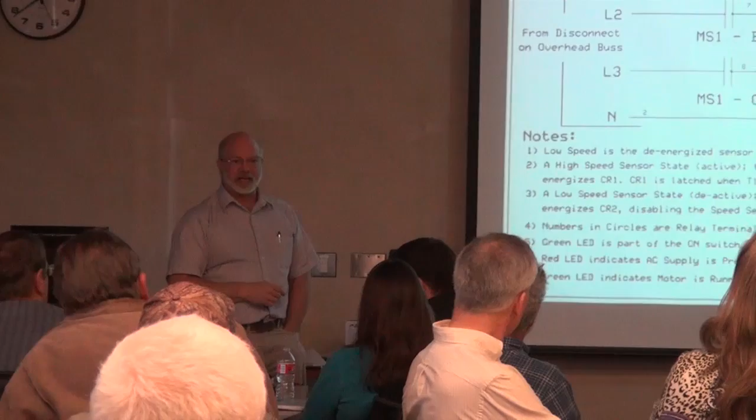The next slide shows what's involved to do that automatically. I'll be happy to explain this to anyone, but there's a sensor on the gear shift. It configures the rotation on the motor, and once the motor is turned on, you can't change the direction. Since then, we haven't had students burning up $100 mills by running them in reverse and trying to cut with them. That's a bit specialized, but it's available to you also.

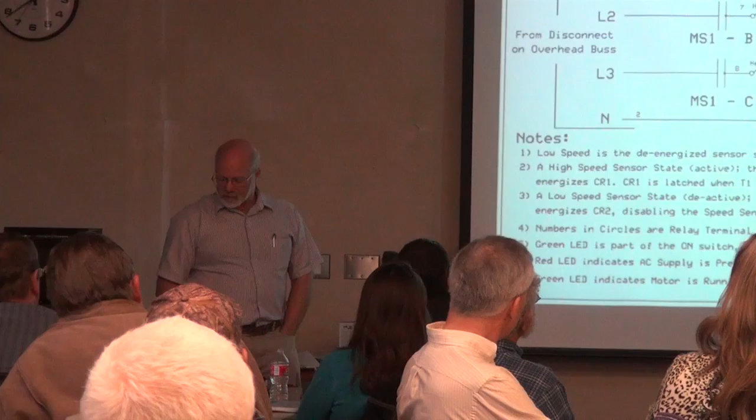To surmise, in order to do these controls, you'll want a job box to put your motor starter in so you can keep it sealed. You'll need a pair of switches for on and off, and you may need to bring in someone to pull a neutral wire for your 120 volt control, which you can use depending on how you size your starter for 240, 380, 480, or whatever voltage level your machine needs to operate. Buy a motor starter, and for some machines you may want to make sure it's two-handed so they can't get their hands in there, so you have two start buttons in series. It all depends on the level of control you need to go to.

On a machine with toe crush possibility, use a garage door opener interrupt circuit, or do a perimeter around your machine so people can't get their feet in. There are a lot of inexpensive, straightforward levels you can go to protect your machine, and any of these can go as a series switch in the stop circuit of the main control relay.

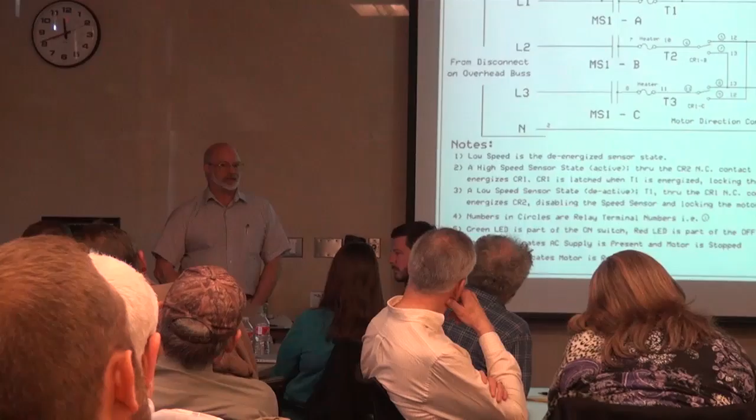My spreadsheet has all the different switch possibilities listed. You only need two of them. So I would think more in the $400 to $500 range to buy the parts.

We're going to an extra level on the ones we're installing in our Journeyman program—there were several quad boxes on the back. There's room here, and we water jetted out for the outlets, so everything is going to be on one box. You can be creative—that's good for digital readouts or auto feed.

Don't hesitate to look on the surplus market. There's a lot of new, old stock, industrially rated boxes and switches out there. How about 40 of these for $200? This is normally $120—a transformer, isolated, illuminated, industrial push switch. The stuff's out there, you just have to look for it.

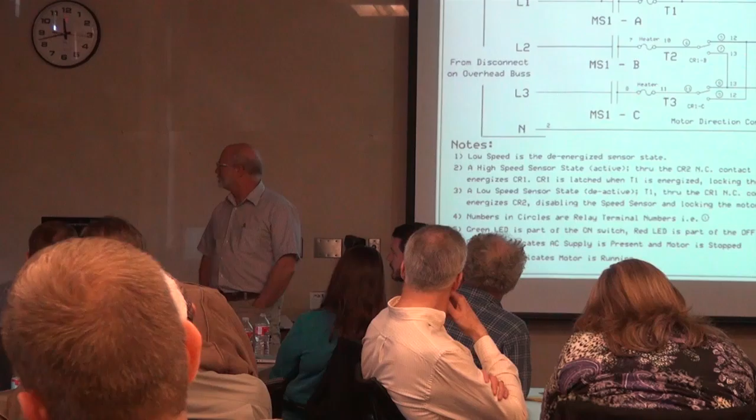It depends—do I have to do 1 machine or 30 machines? If you can't afford to do 30, do a risk assessment and decide which machine to do this year, or a couple of machines, and over time you get them all done. It is costly, but if you're creative, maybe Mark can facilitate you finding some of this stuff. That's a great deal—I can always give you direction on where to find switches, what's out there.

Larry, did you have a question? Yeah, we put all the anti-starts, emergency stops, on all our equipment in the shop, for the power plant. It was all bought, our electrician supervisor bought it all, and it came to around $2,400 for e-stops and anti-starts for 3-phase, 208.

How many pieces of equipment roughly? A bunch of it, we have a bunch of equipment over there, you saw it all. So that was a lot. We put e-stops and anti-starts on all of it. Wow, what was the price? I think it was around $2,400 for the material.

Oh, you had easily 25. I have to get with the machine shop, with the electrician supervisor, because he's the one who ordered it all, and his guys put it in. Just $100 for a motor starter, enclosure, and switches. See Larry, see how we did it, that would be pretty good.

It's possible, I believe the price of these was $20 a piece for the boxes. So depending if you're shopping well, you might be able to do that. Again, he's buying for 20 of them, not just buying for one. Yeah, we bought for the whole shop at one time. Right, through one of the electrical dealers, he was able to get a good price.

Elena, did you say there was possible funding? WCI, that's the workers' compensation, it's open to any department you can put in. I know that facilities, PMCS, and McDonald Observatory were successful in putting those in. And I know Neil Crump would be happy to lend you the spreadsheet so you can have a starting point for departments that maybe don't have the same resources utilities had.

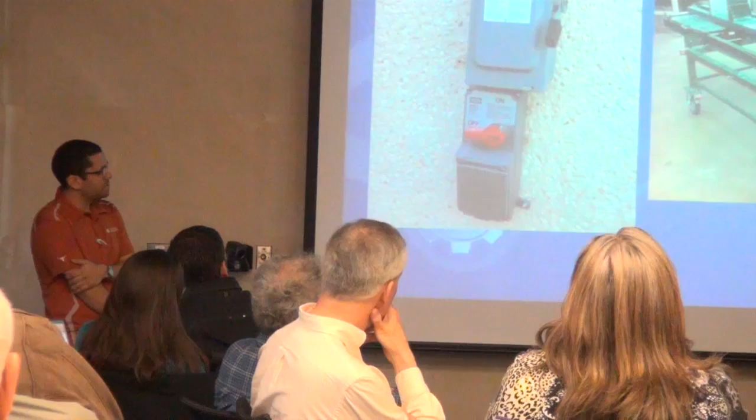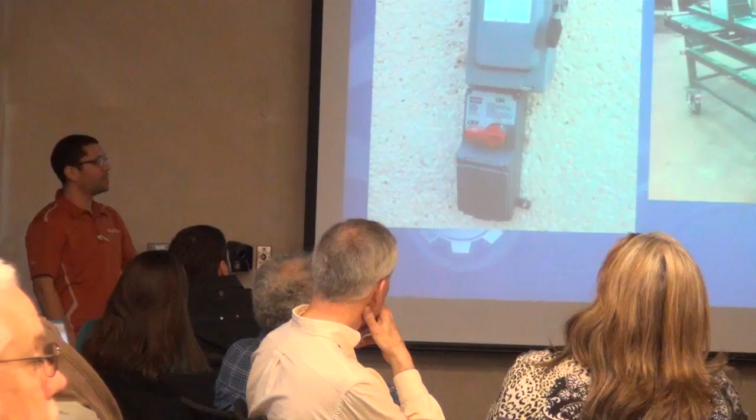And then they actually put two levels of ground fault protection. They put a GFCI on the actual machine in case someone took it to some other part of the building and plugged it into an outlet that didn't have that protection. They're spraying water everywhere, so they're still going to have their ground fault protection.

I think we got a little closer up picture right here - you can see the cord, and then there's another one that runs. Yeah, you can see, this is the back side, so it runs all the way around. That's an example of people who use the equipment understanding the safety needs, and then balancing that with how they're actually using the equipment to make it work out.

Those are commonly used on power rollers too. Think about how challenging it is to guard the ones where you feed the metal into the rollers - you can be more creative with that, but to have something like that on both sides, that you go back and forth, that's nice. After the fact, I mean, it's an emergency stop after maybe you're starting to get drawn in - it doesn't prevent the start of that injury, but it certainly affects the severity.

Okay, the next presentation is something we're going to try to have all the shop supervisors and all of y'all be able to communicate with each other - UT List. Has anyone used UT List before? It's an email-based group discussion kind of thing. This is kind of the beta version, we're going to see how it works. The goal is to let y'all talk to each other in an easy way. We don't want to make it hard, we don't want to add difficulty, but we want different shops to be able to talk to each other and say, hey, I have a Delta drill press from 1972 and I need a new belt cover on the top.

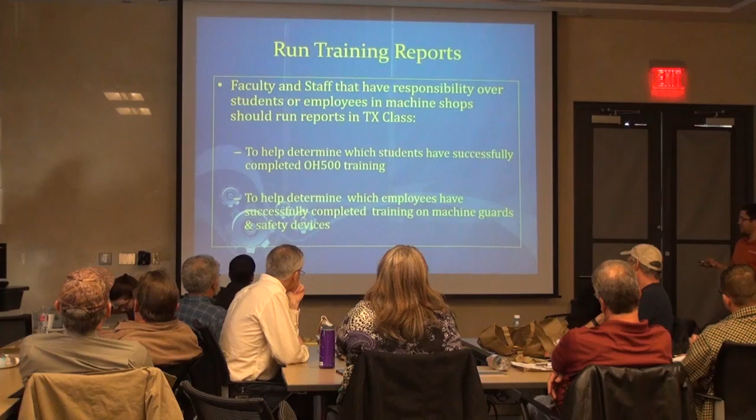For y'all to actually be able to keep track of your own employees or students working in your shops, it's a fairly simple process, and we'll have all this stuff available later. You send an email to this address - you can title it however you like, and all you've got to do is put 'authorization request, training history' in the body of the email, and then your EID. That's all you've got to do.

You'll get an email back from someone within TX Class saying you now have authorization to run reports. You'll get the confirmation email and you'll be able to run the report.

So it's a little harder to find - if you just go to utexas.edu/careersmart, that takes you here. You can click the link here for TX Class, and then you log in with your EID like we all do every day. Over here you'll have training history.

There's two ways to run training reports: individual queries and group queries. Your individual query is clicking on training history here and entering the EID of whoever you want to find out about - say your shop supervisor - you enter their info, press the button, and it'll list every course they've taken. It's not specific to OH500 or OH506, it lists everything.